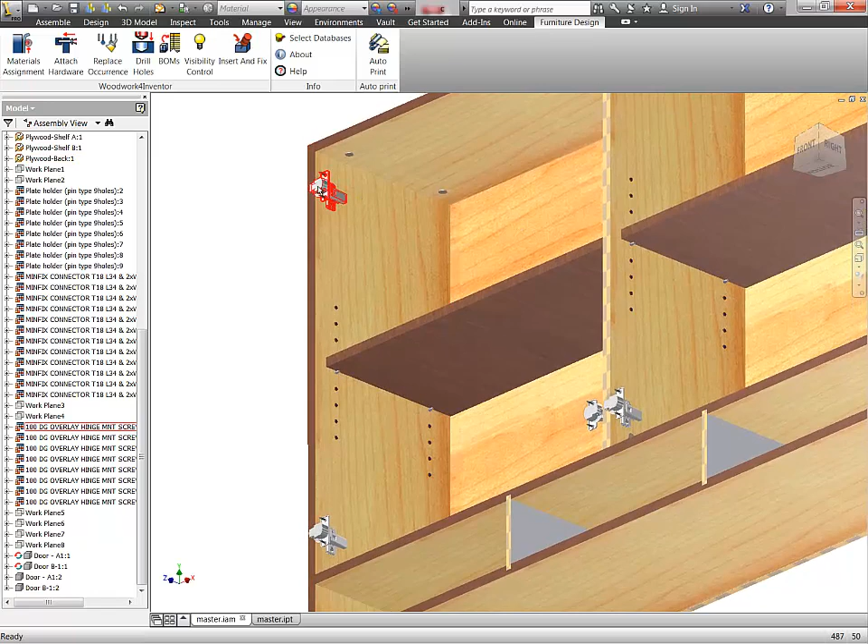So again, we can do this more in a manual mode in Inventor, but developing certain tools allows me to do what I call automatic drilling. I can just hit the yes button and it'll prompt me: do I want everything to be drilled at one time, or I can selectively drill what I want. And again, without going back and forth into parts, into assemblies, projecting all the things that we have to do today, this is taking care of it in one step.

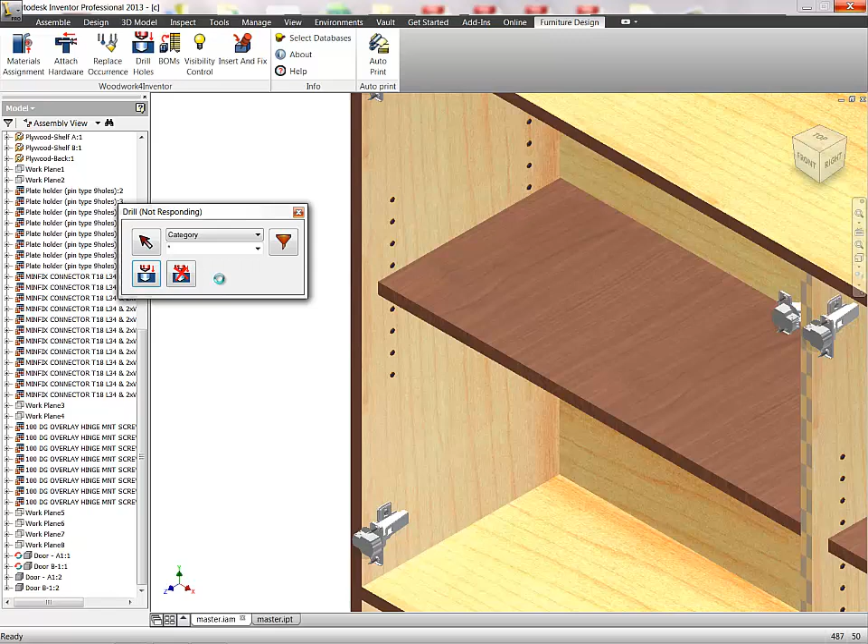That's why we can think of the joinery and the hardware after the fact rather than as we're building. Because as we're building, sometimes we're not sure where things should go. We're doing just conceptual modeling. We're trying different things, addressing different issues. Clients are asking us to change on the fly, and if we put lots and lots of time into the model, backing out of it sometimes does take a bit of energy.

So this is going to minimize as much of this, and we've seen people start using tools like this and save a day a week per designer. Also, it's going to give us accuracy, easy to attain accuracy.

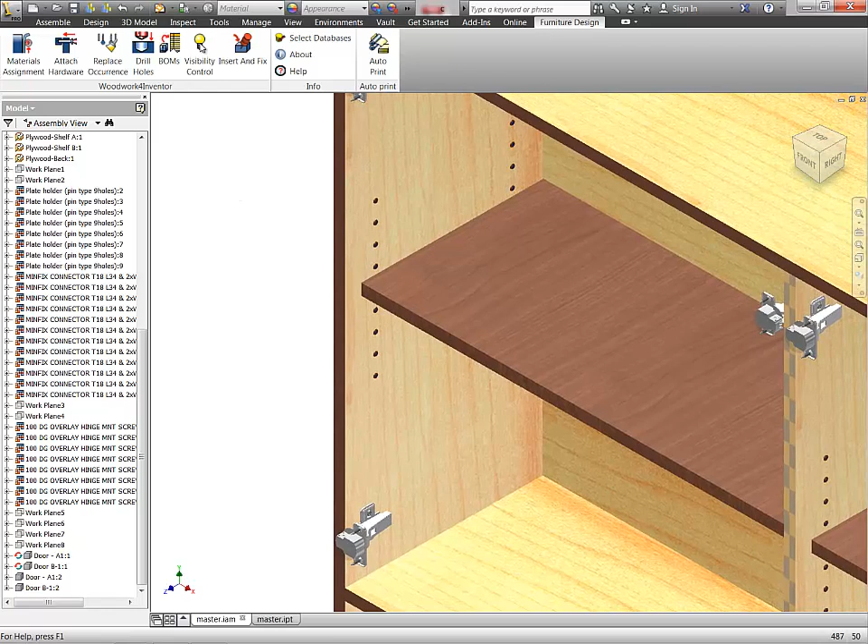I'll turn off the hardware so that you can see that all the holes, all the negative shapes were drilled. It's a one-time affair. We can do it up front, we can do it as we're putting the hardware in, or we can do this after the fact. So again, it's up to the individual user to determine when they would like to do it. But the workflow does change from what I'll call traditional Inventor workflow to a whole different mode and method.

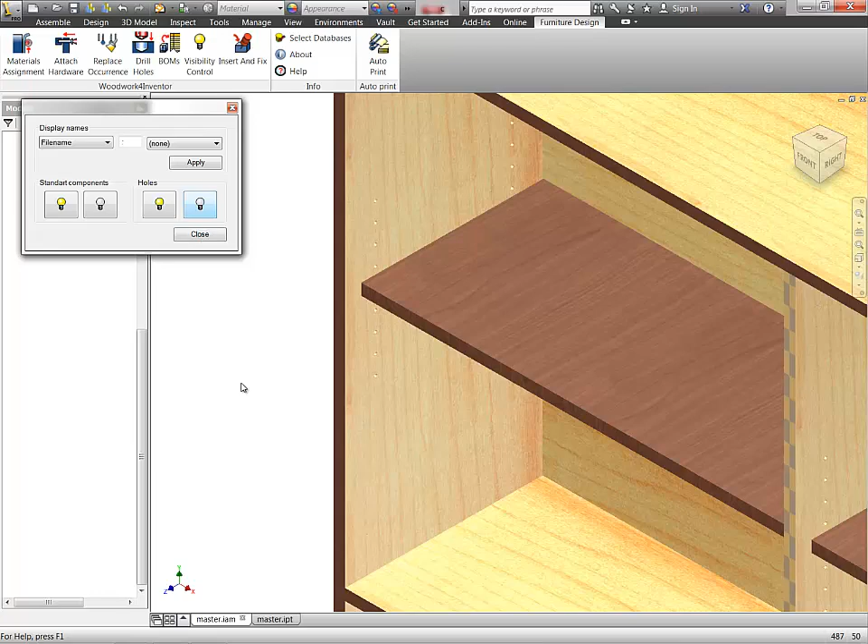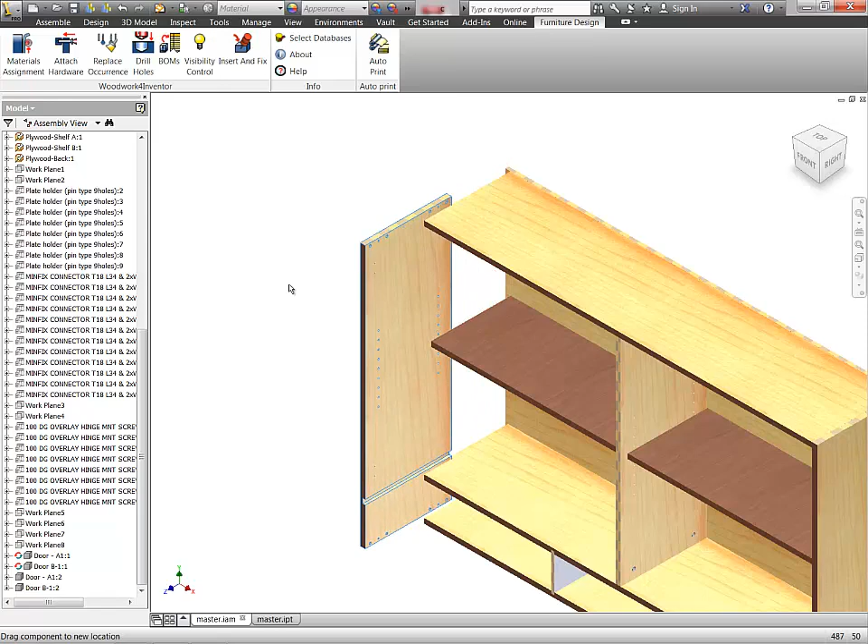I'm zooming in a little bit more so you can see that in fact it actually drilled the pilot holes for this. And if I go out to the fabrication drawing, of course all of this will show up. Now I'll unground the left hand side and I'll show you that it actually did drill all the holes, absolutely based on the cam connector configuration, including the clearances that were necessary at the time.

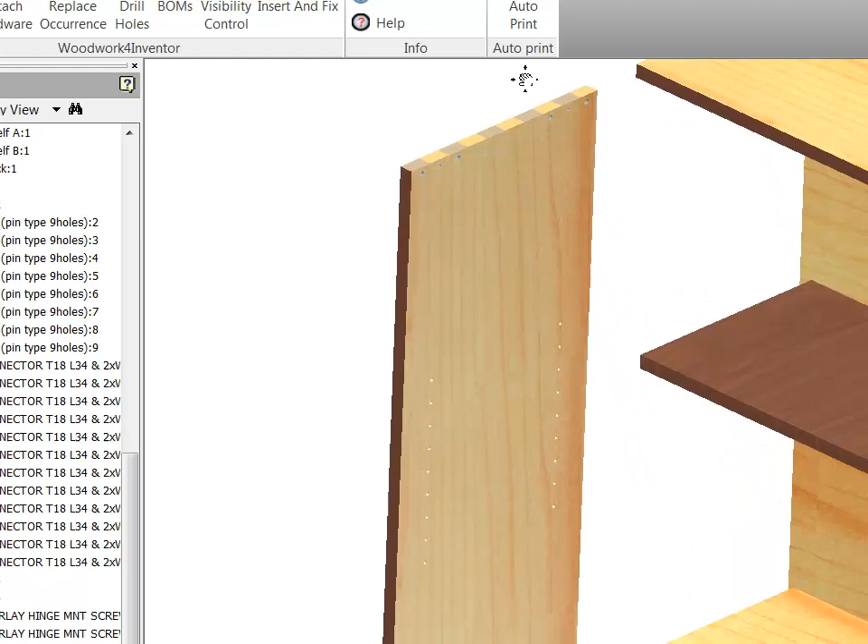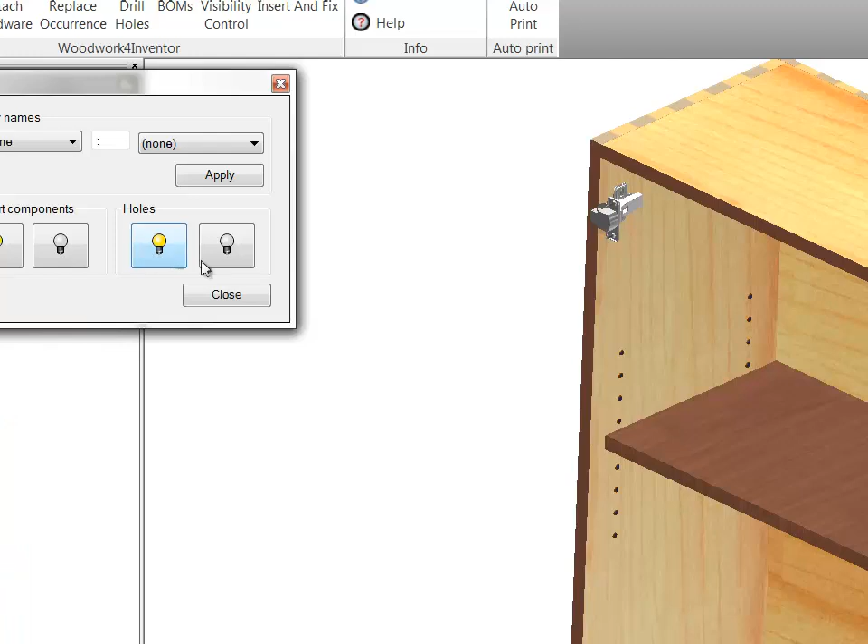Taking a look at the top horizontal piece, you'll see again the matching holes were drilled, and I didn't have to rely on adaptivity or projection, which could cause novice users to get into a little bit of trouble. Let's turn back the hardware and we'll recognize the fact that everything is definitely lining up the way that it should. So definitely a different workflow, hopefully an easier method to get up to speed. More considering design than anything else.

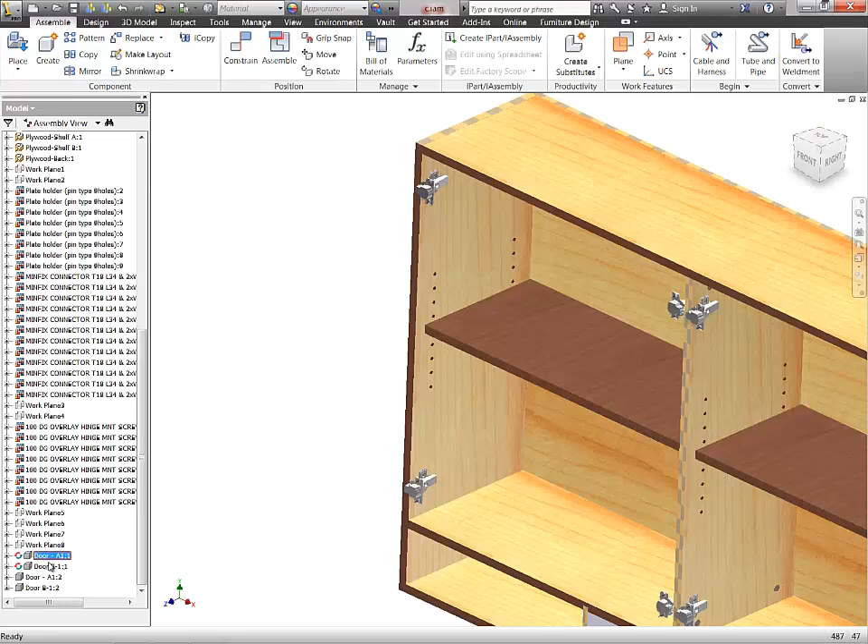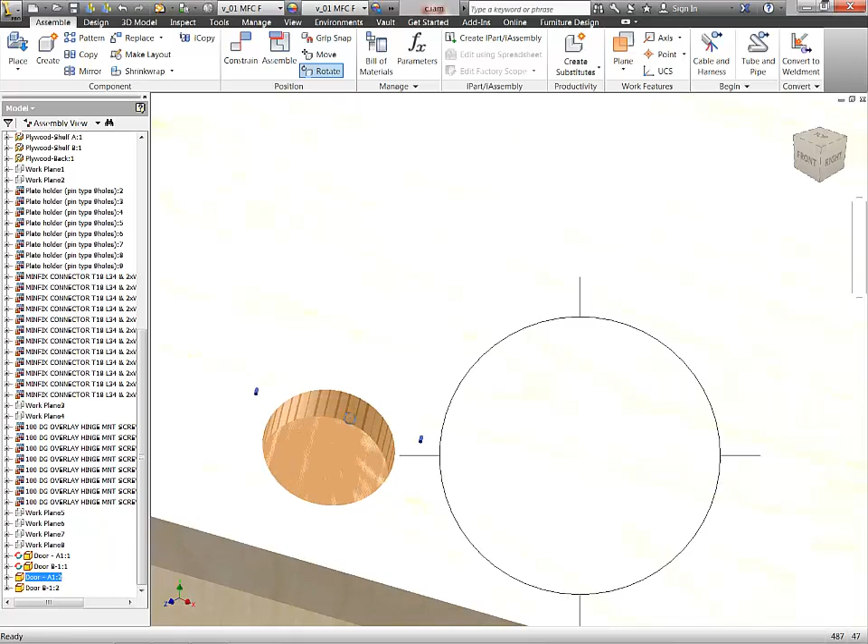So we save our drawings. Let's turn our doors back on. I had the doors off so we could see the hardware, but let's rotate a door. By rotating a door, you'll see that it also drilled the back of the door absolutely correctly, based on the hinging condition of the constraints that we put on to begin with. So it drilled the large pocket, and it did the pilot holes also on all four doors. So just rotating them so visually you can see that. And we'll do an update on that.

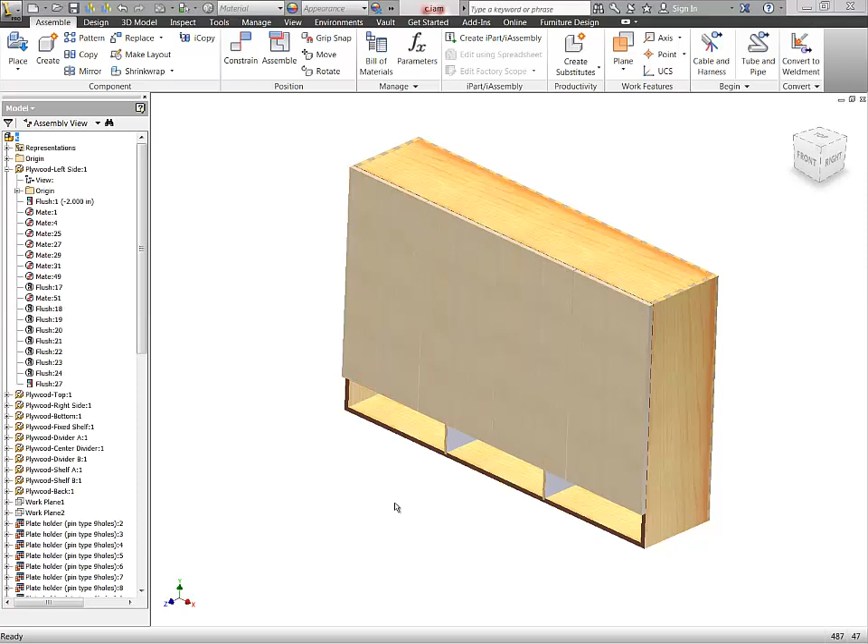So one more step. Let's go ahead and put some door locks onto at least two of these doors, a double door lock. So I'll turn off two of the doors so that we can see it a little bit better as we're attaching it. And as we did before, we're going to a library to place hardware that already exists. I can't stress enough to make sure that your libraries are up to date.

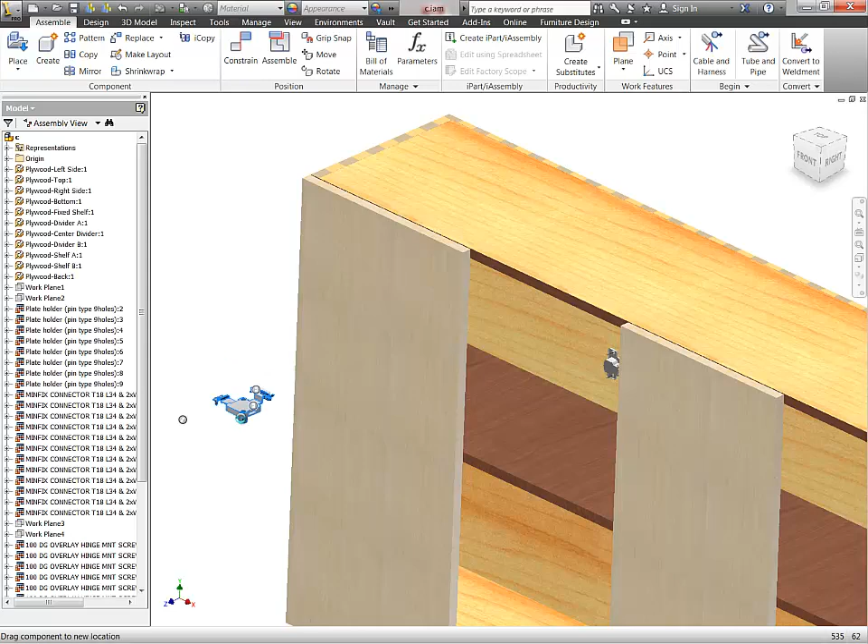That things are in place, because it's definitely going to save time. So bringing in a particular piece of hardware. This will be mortised into the top panel of the door. There's pilot holes, a whole host of things.

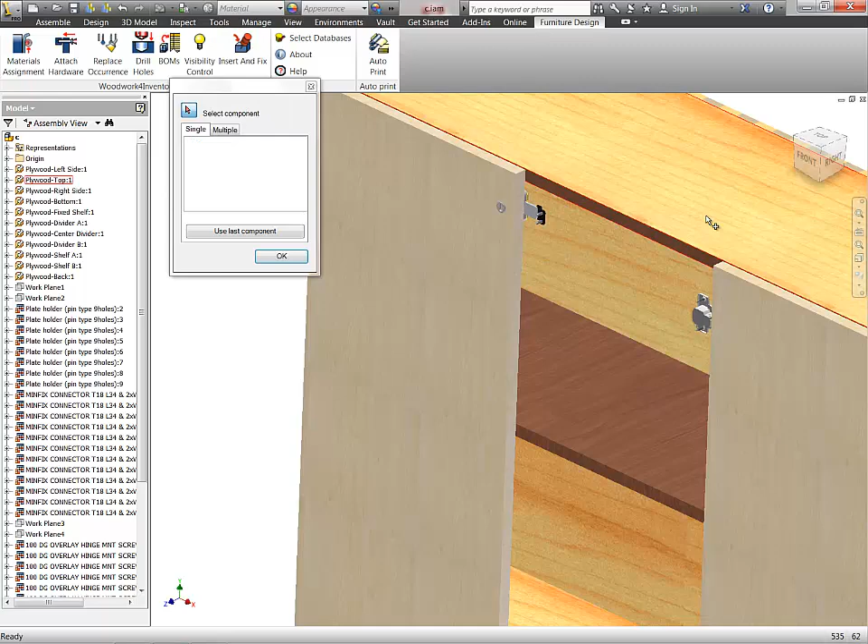And again, as before, we're going to attach hardware, and we can either attach it singly or we can attach it multiple locations. So it's going to ask me for the face of the door, it's going to ask me for the edge of the door, and then it's going to ask me for the top of the cabinet. It can't be simpler than that. And hit OK, and you can see that it places the hardware in automatically and accurately.

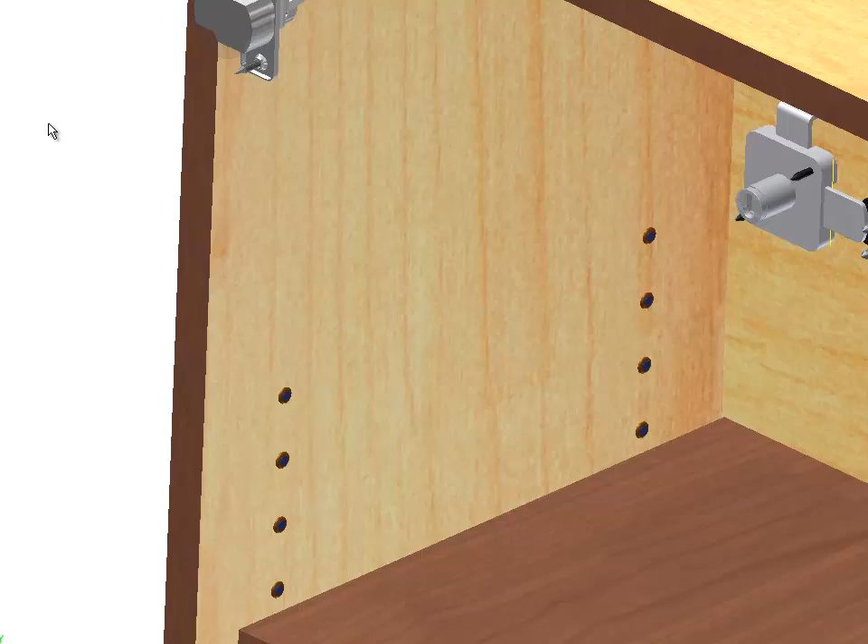So we'll turn off the visibility of the doors so you can see that there are multiple things that we're going to attach to or needs to be drilled. So as before, if we want to drill holes, all I have to do is touch what I want to drill and hit the OK button, and it'll drill those holes. So we don't have to drill the whole unit. All we have to do is drill a particular item if we so desire.

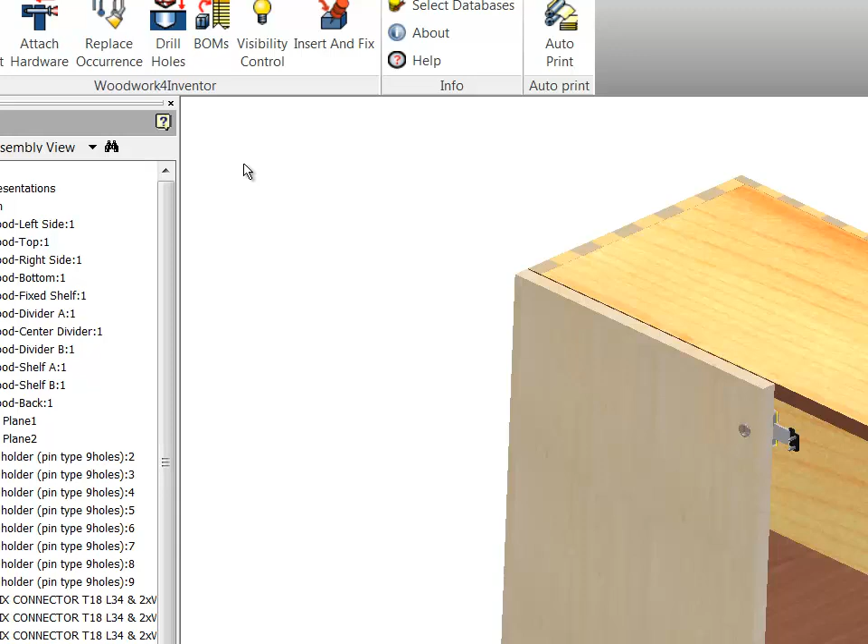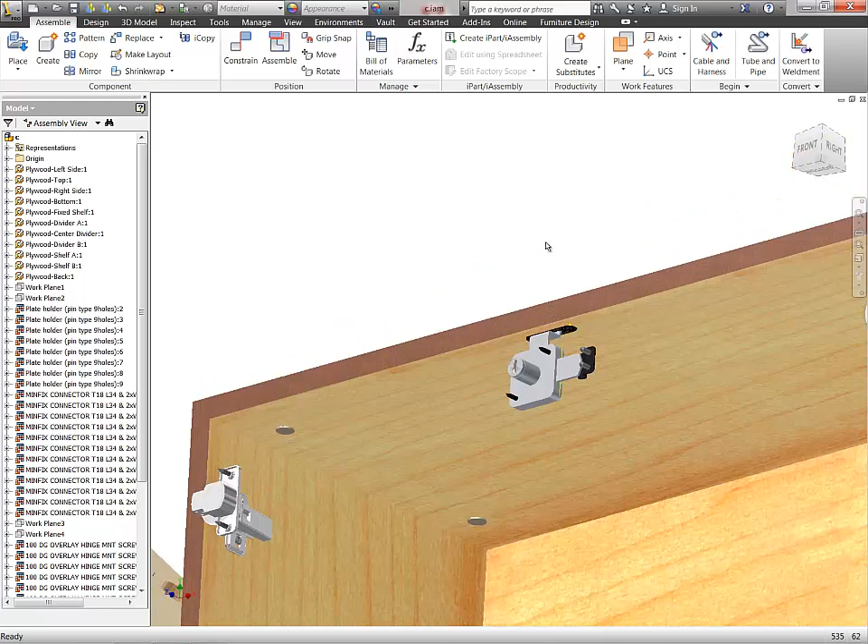Once you rotate the door, you'll also see that the pilot holes are drilled and the center pin for the actual key is drilled with it. As we get closer and we take a look at the top, you can see the top of the unit also is mortised. So you could have multiple things happening simultaneously and not at all be concerned about projection of at least 3 or 4 different planes all at the same time.

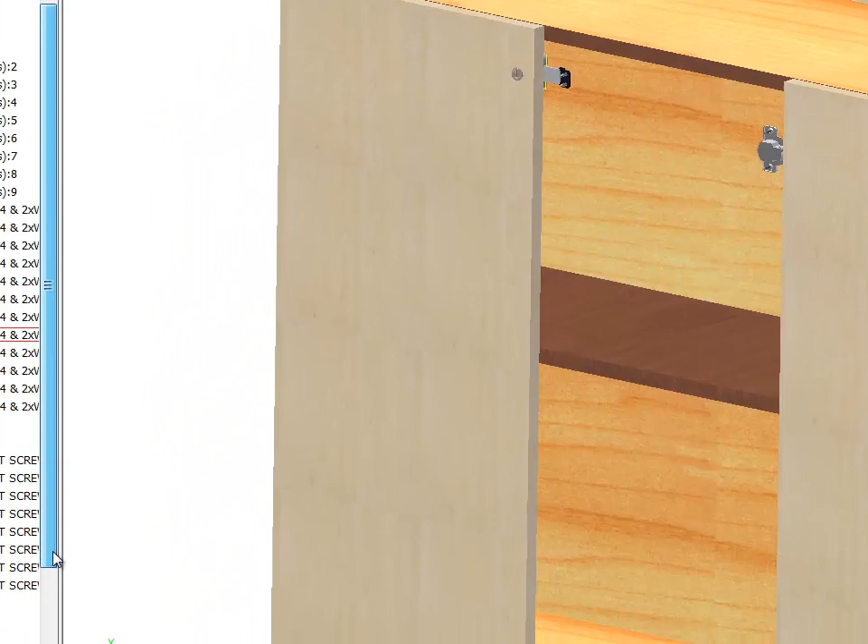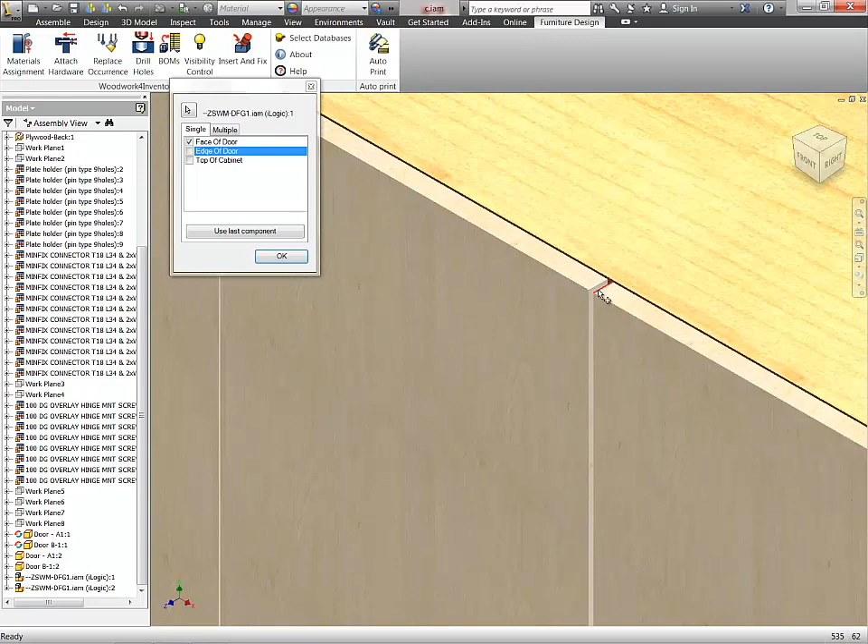We'll turn the visibility of all the doors back on, and I'm going to add another lock for the right side door, and the doors can be closed when I do this. So we'll attach the hardware, touch what we're attaching, pick the face of the door, which we just did, pick the edge of the door, and pick the top of the cabinet. And there we have it. Drill that, and we're done. Save our work.

Autodesk Inventor does quite a good job in terms of creating fabrication documentation from our 3D model, our assembly, and our parts. Creating front view, top view, side views, sections, details, creating parts lists, bills of materials, dimensioning, adding text and notes, basically creating a 2D document for printing or for presentation to clients for approvals. Many different aspects of the 3D model put into a 2D world.

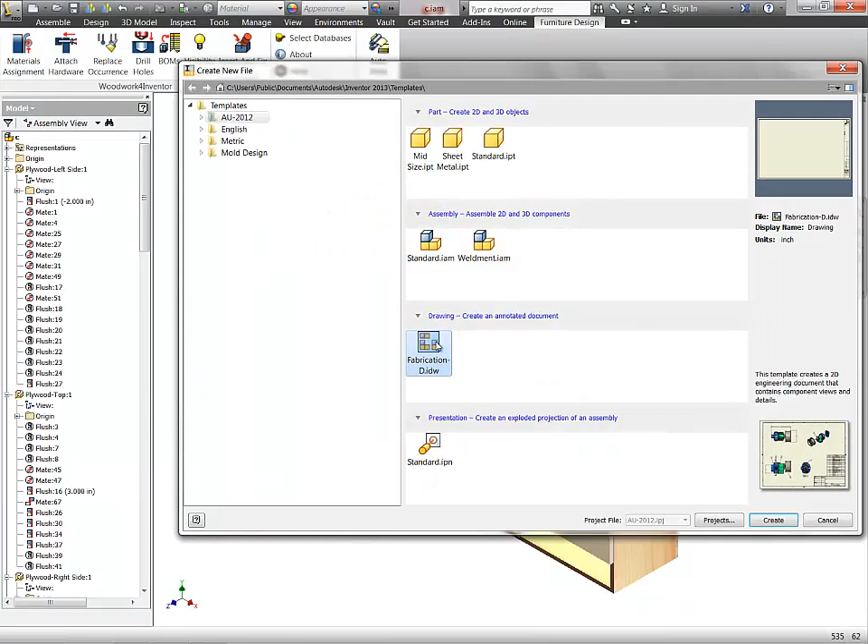What I'd like to do is show you, though, some of the automated tools that are available in many of the third-party tools that are available for you, and one of them is called AutoPrint. So first thing I'd like to do is to start a brand new drawing file, and this could be an IDW or DWG. It really doesn't make a difference, with attributes, without attributes, and we have a sheet of paper that we start.

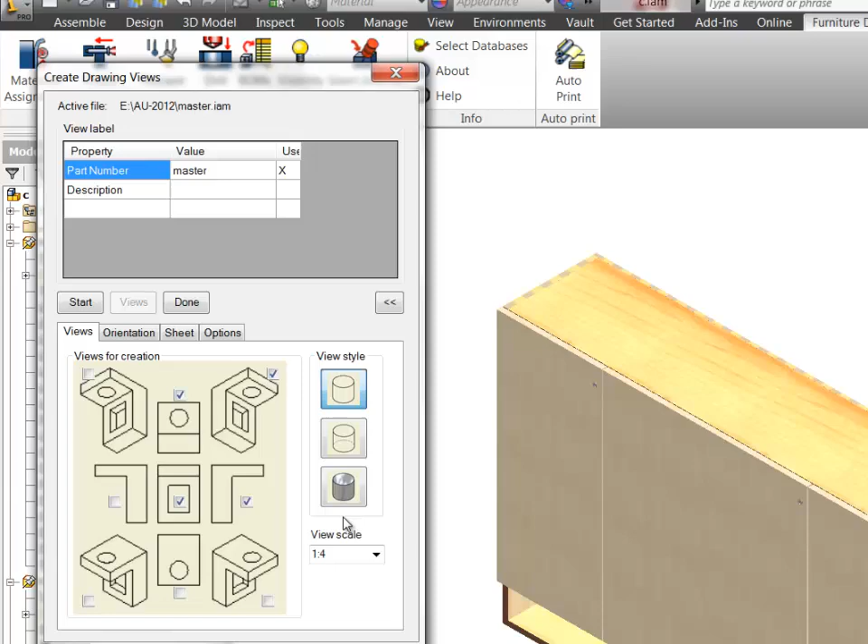Second step is to do AutoPrint, and in AutoPrint we have a dialog box that allows us to present shaded views, hidden line views, and so on, and which views we want and what scale we want. Once we've decided on how we want the presentation, then we can go to orientation and we can determine how things should be twisted or turned on the sheet of paper. And then, of course, what do we want to present? Maybe we don't want the hardware in the part views.

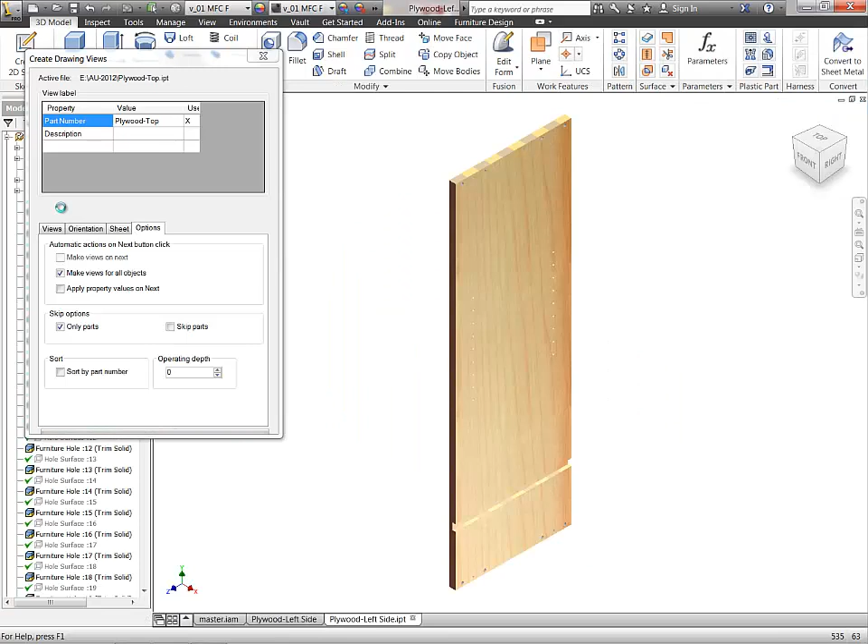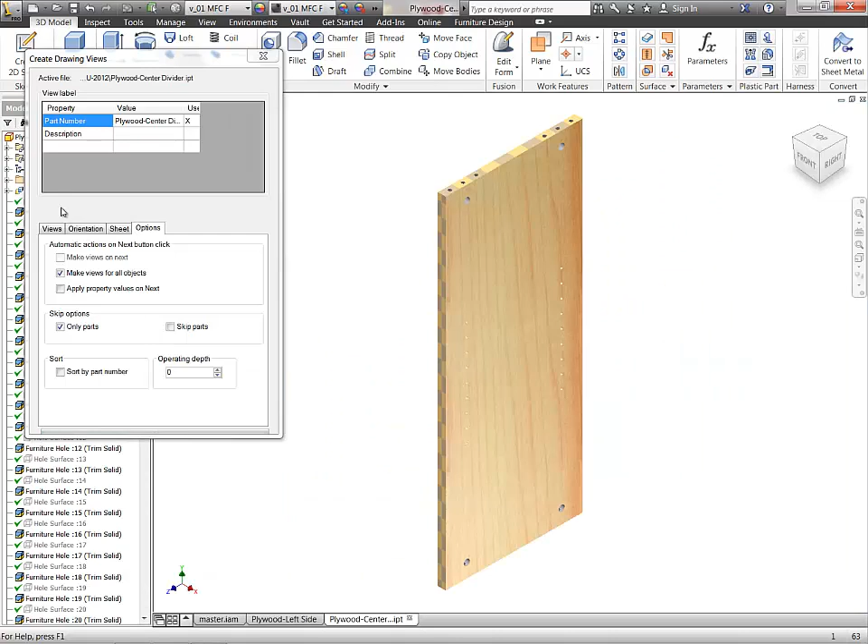So once that's done, all we do is hit the start button, and the tool will now interrogate the entire assembly and sub-assemblies and start creating separate drawing files of each of those particular items. If they have the drilled holes for the pilots, for the hardware, all of that's going to come across in the drawings themselves. And of course, they're going to be linked back to the actual assembly. So if the assembly adjusts, then of course these will adjust also. So everything we've done to this point, we're now creating drawings of.

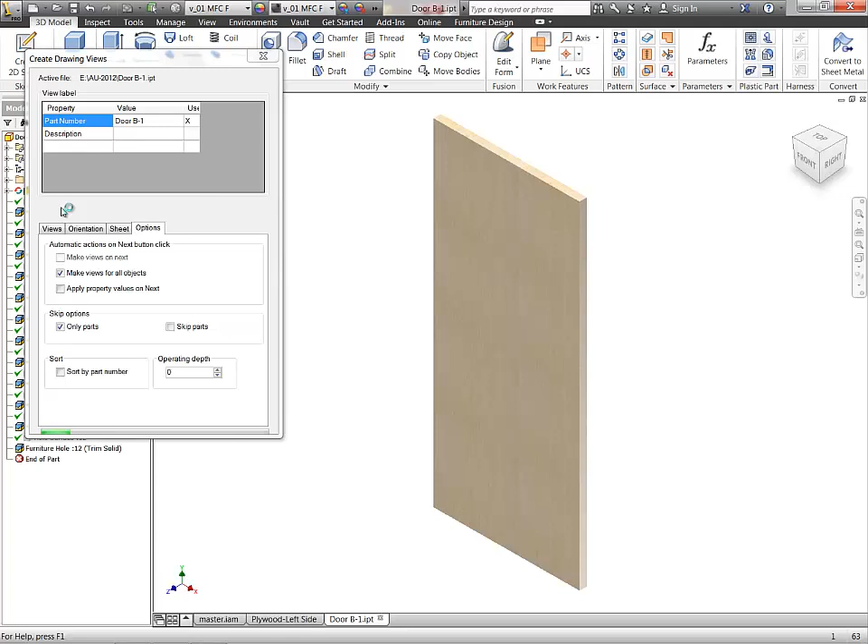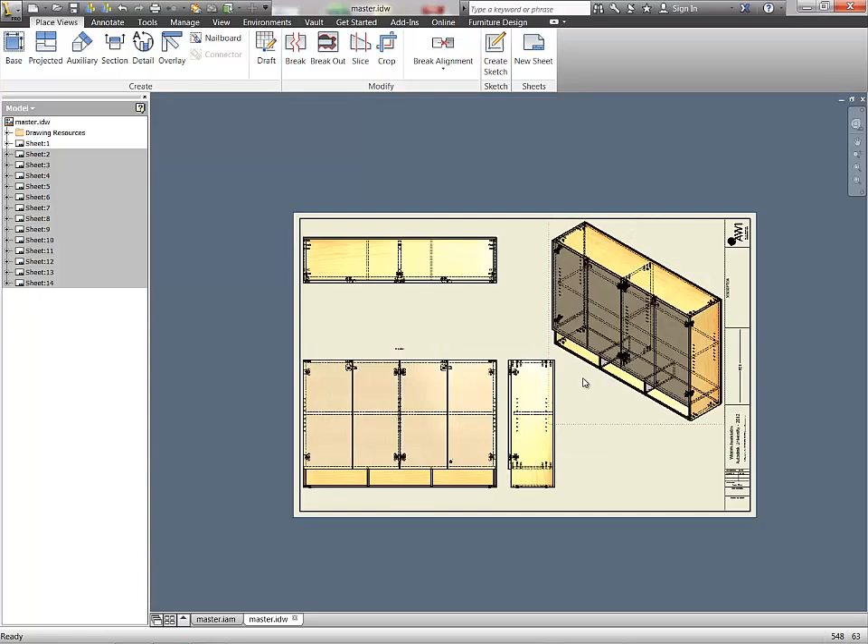Okay, so it's finished its process. Took under 40 seconds for about 15 parts. And then what I'm going to do is go into the drawing file and just take a look and see what we have. So in the drawing file itself, you'll see that we have in sheet 1, I'll call it the master assembly. That is the parts, the full assembly showing all the parts, all the hardware, everything else.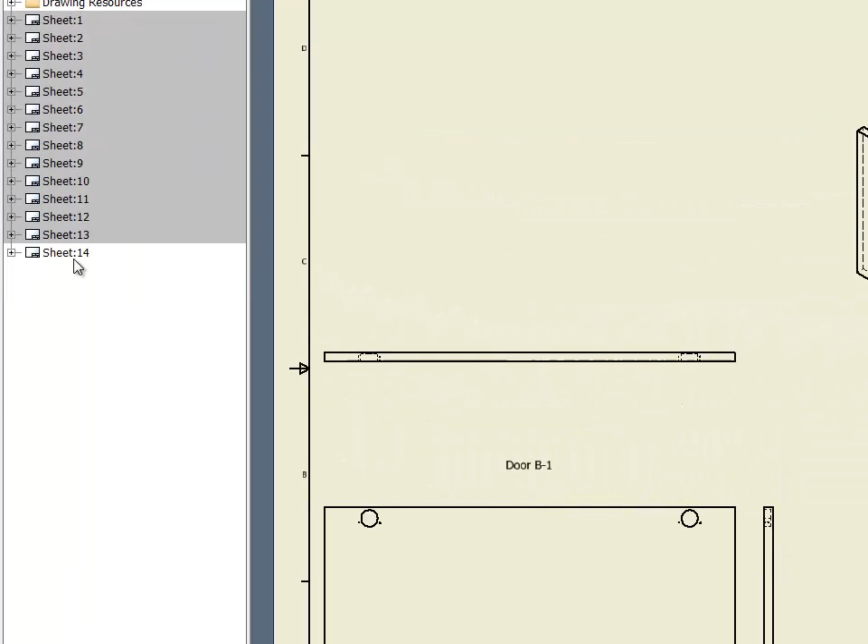If I go to sheet 1, you can see it's the left side, sheet 2, the top, and so on and so forth. And what's going on here is on each separate sheet in this drawing file will be a separate part. The parts will be numbered or lettered based on the name. This is called door B-1, and that's a plywood top. So again, very simple, easy to do.

Now let's take a look at the assembly again. And I'm going to turn off the visibility of the door and take a look at the fact that we did do some edge banding there on the top and the right hand side. So here's plywood top drawing. And I have a tool called Mark Edges.

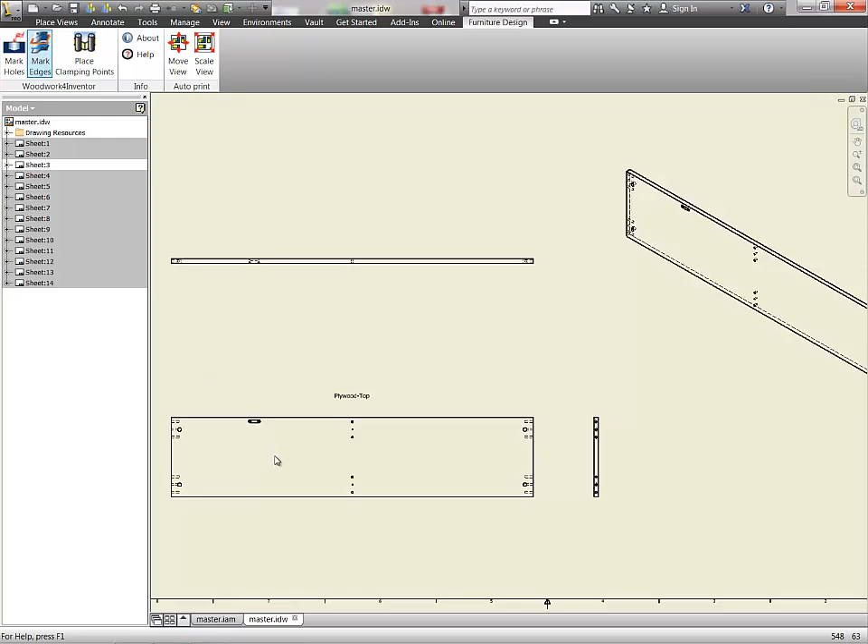And when I pick Mark Edges and touch that top, several things are going to start to happen. It's going to interrogate the drawing and it's going to mark it in two ways. One, to show the edge banding, and two, to show the grain direction. So I can do this on individual drawing sheets, or I can do it on all drawing sheets.

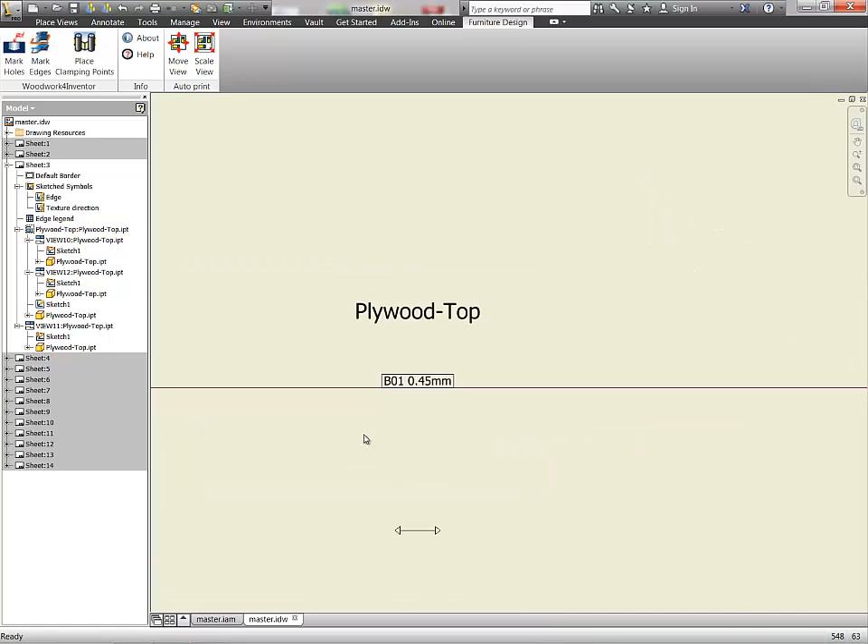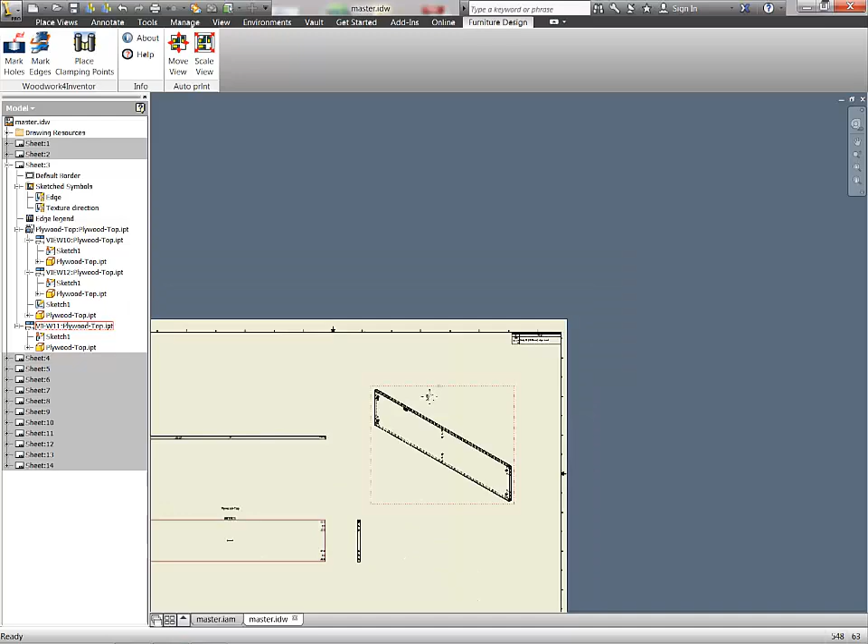So if we take a look now and I zoom in, you could see that that is the code name for that piece of edge banding, and you can see there's a thickness there. And that thickness is showing you the edge banding that of course can be dimensioned. If we go up to the top right hand corner, it also creates a legend of what edge banding was used. So if edge banding is part of your day-to-day operation, then this might fit. It's also showing you grain direction all at the same time.

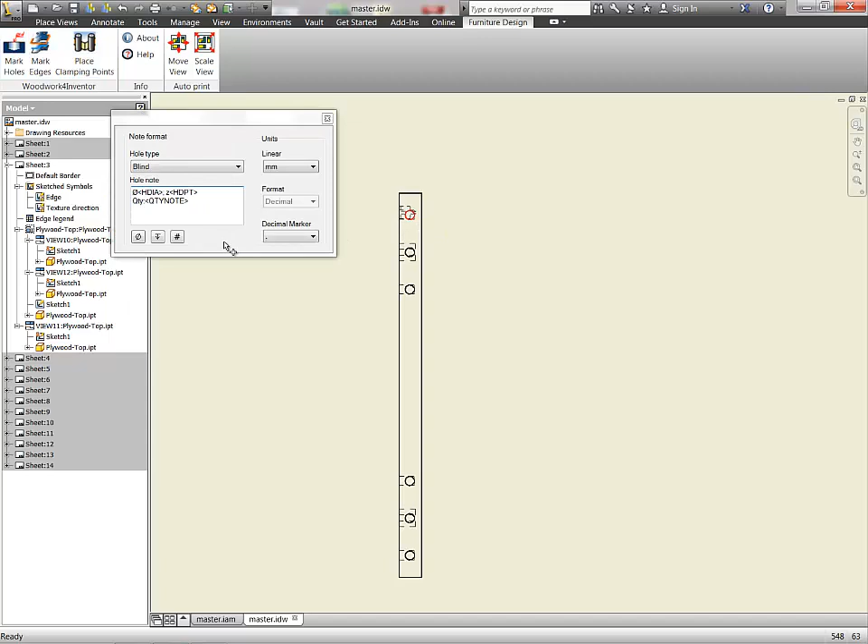And then of course if I want to shade it, I can shade it because it's going to utilize all the same tools that are in any drawing file in Inventor. Hidden lines, not showing hidden lines, all those things are absolutely doable. We can also do something called mark holes. Okay, it's very much like the hole command, but it is going to be slightly different in our world because it will create a whole environment on a leader that's unique to woodworking.

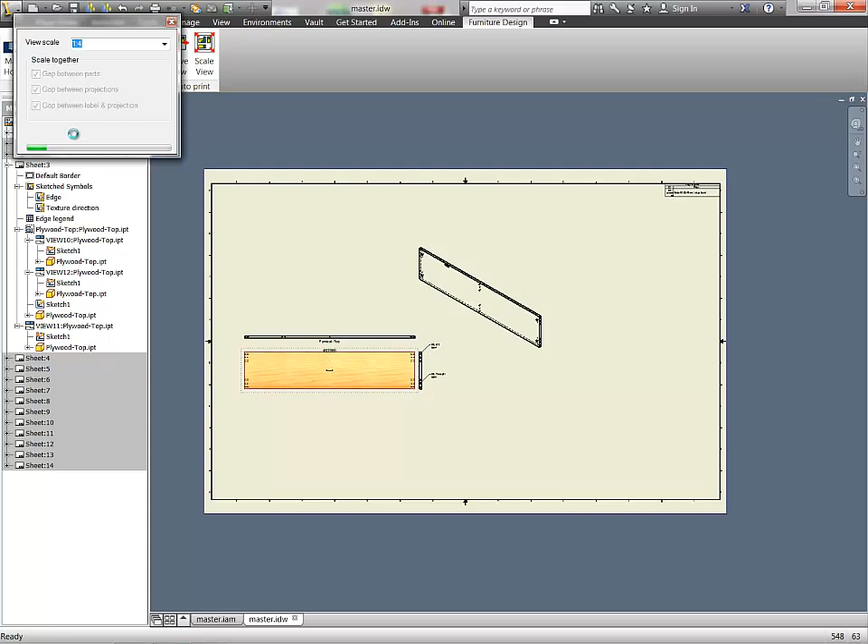So we have a couple other tools that are part of it. We also can scale views. Now this is a little different than scaling in normal drawing files because when you pick scale, it scales all the views at one time. Now you can only do that with projected views, but what about isometrics? This is doing all of them at once. So again, some enhancements that might be beneficial for you.

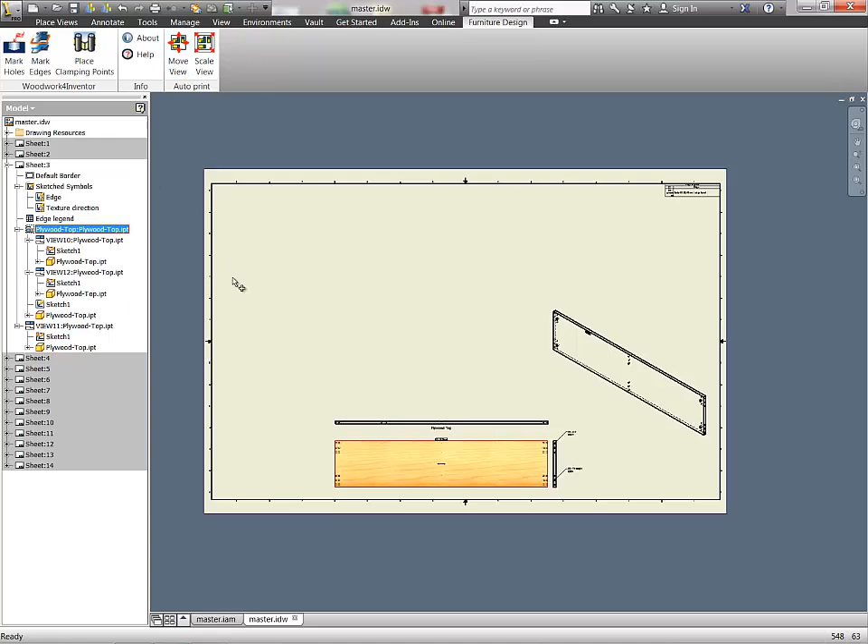You can also move all the views at one time and keep them oriented to themselves. Normally that's something you can't do with the normal tools in Inventor. You can move one view at a time or the projected views. So edge banding can be utilized here.

iLogic has been available inside of Autodesk Inventor for the last several versions and is probably one of the most effective tools in the creation of library items that can be reused over and over again. Very effective, and it acts as a configurator. So when we're building doors, drawers, carcasses, we have the ability to apply a menu system that allows for change. Again, very good for standardizing anything within the design environment.

So let's get to the model and take a look at how we can apply iLogic to it. The first thing we're going to do is go into parameters when we're in the assembly and assign 3 or 4 parameters to the assembly. Length, which again will control the model. We'll say 60 inches. We'll now apply thickness, which of course was 3/4 of an inch, because I want the ability to change it at any time.

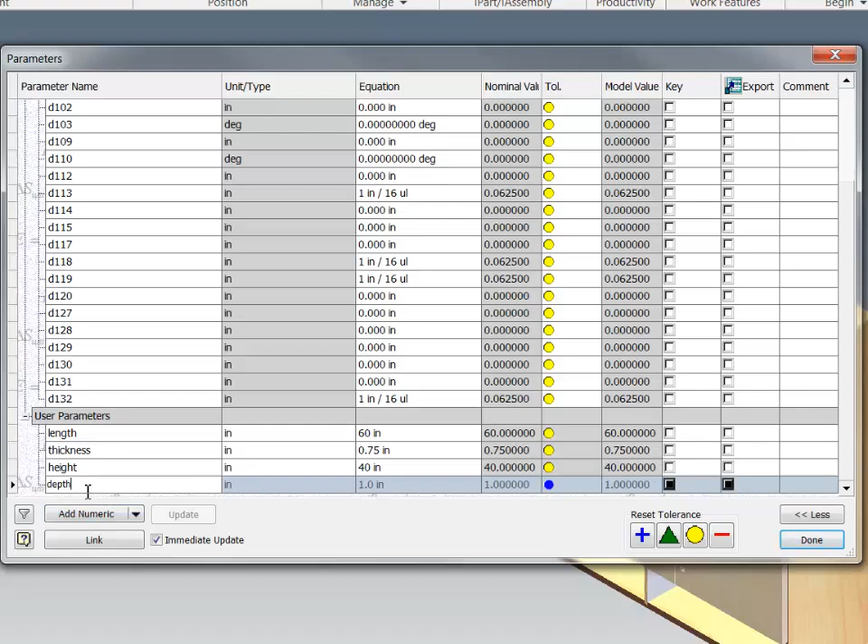Other parameters, for example, the height of the cabinet, which I believe is 40 inches. And then finally the depth, the front to back dimension of the cabinet, which is 13 inches at this moment. So what we've done, we basically have added variables to the assembly, but we've not hooked it to anything.

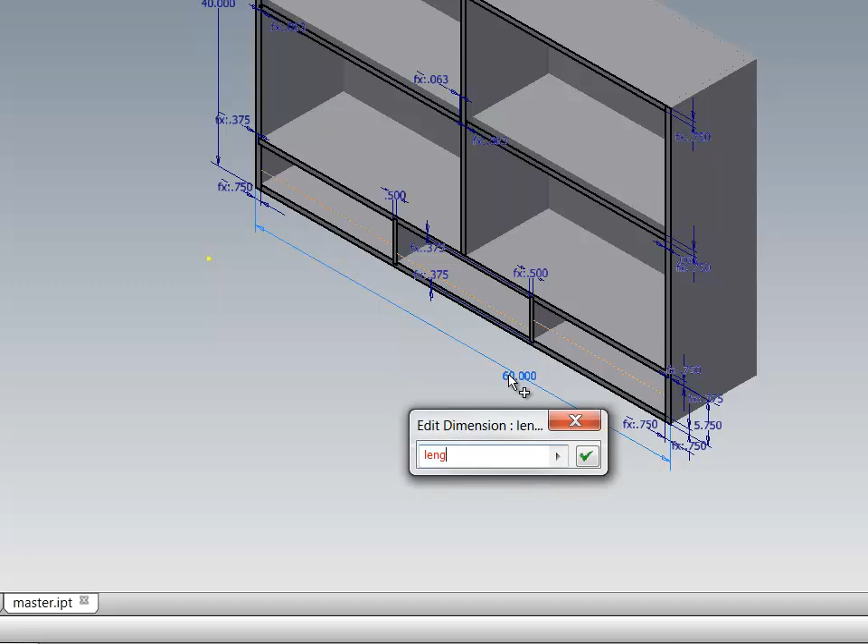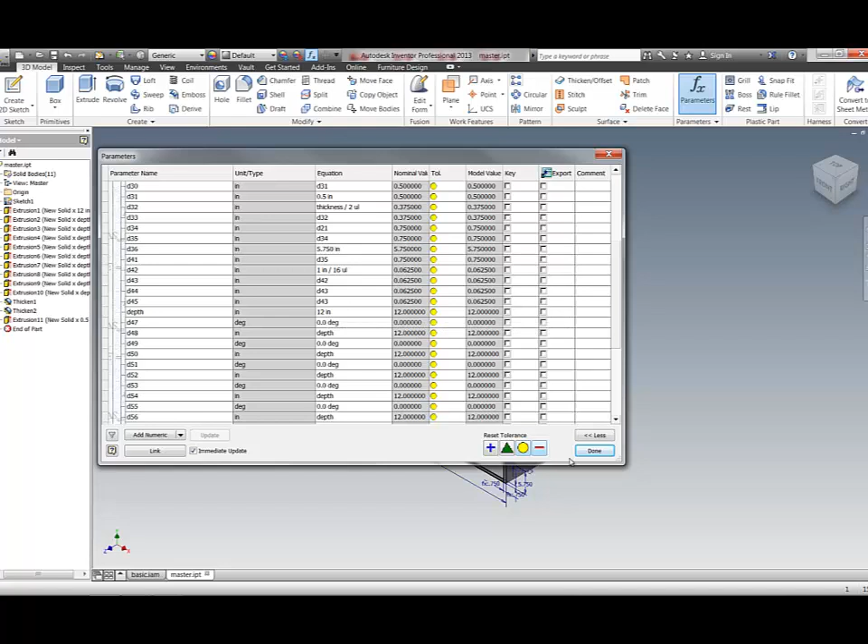So the next step is, let's open up the master part. We'll double click on the actual dimension that was length and type in length equals 60. So we added a variable. The next thing we'll do, height equals 40. Again, this will change the parameter table. And then if we go into parameters, you'll see we have length and height. We already have thickness because we've assigned it, and we already have depth because we've assigned it. So we've done everything that we need to do.

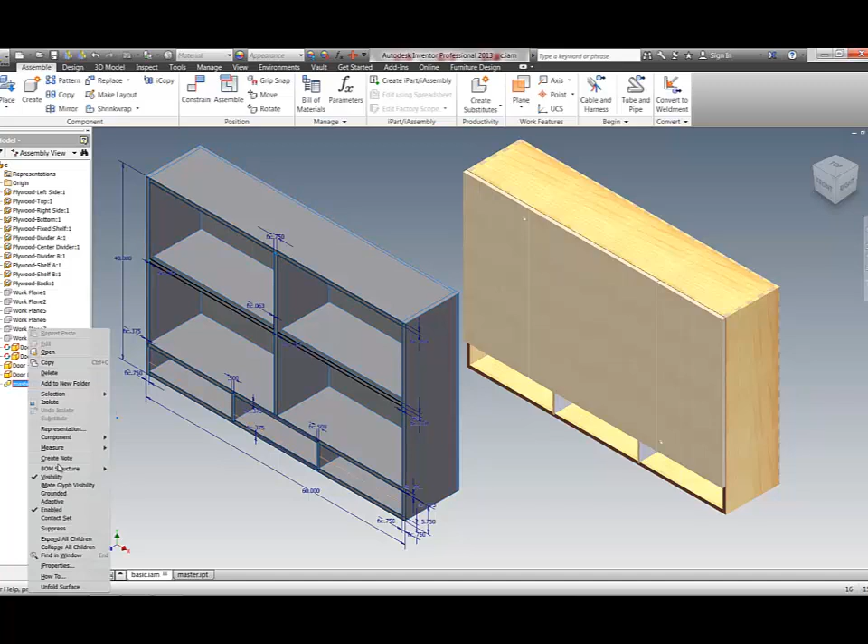So we save the part file, the master part file, and then we do a copy and paste, and then we bring the master part file into the assembly itself. So we're pasting it in, and once it's pasted in, we'll just turn the visibility off of that part. So we have that within this environment, and we hit save. So those are a couple of quick steps.

At this point, we go to Manage, we go to iLogic Browser. We see we have what are called rules and forms, and the first rule we're going to set up is a rule that allows us to pass the assembly information to the parts themselves, thusly controlling the part. And this is a very, very simple, straightforward process. So we hit OK, and it opens up a dialog box that allows us to do some minimal editing.

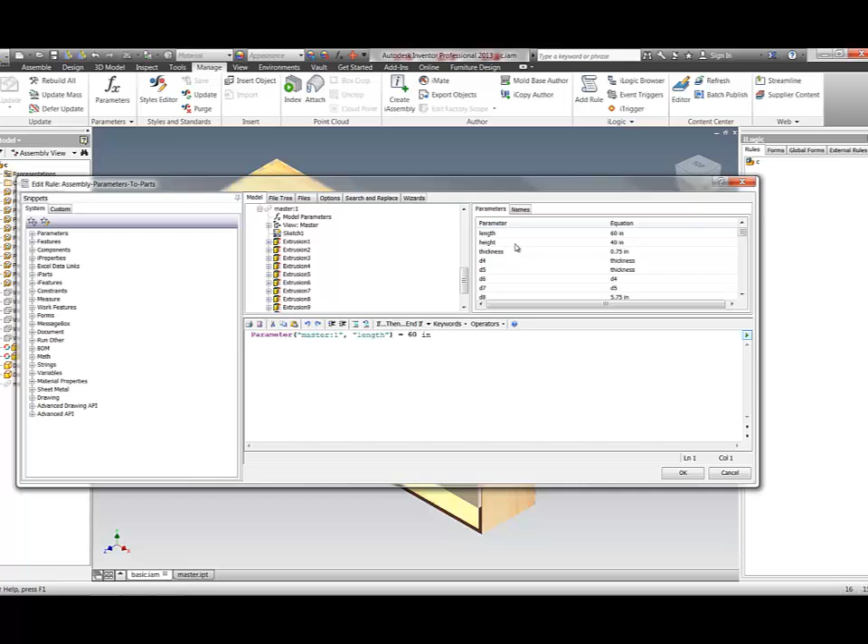So we'll go down to the actual part file. You'll see there's a directory structure here, and we'll grab the length, right click on it, and right click on height, right click on thickness, and right click on depth, and this will capture the current state, and you can see that it's filling in the information in the lower box. So it says the parameter in the assembly equals whatever the value is at the moment.

Then what we'll do is go over to the assembly parameters and say let the length value in the part file equal the length value in the assembly file. The same thing with height, the same thing with thickness, and the same thing with depth. Again, this will be in the handout, and it'll also be in the demo set for the class.

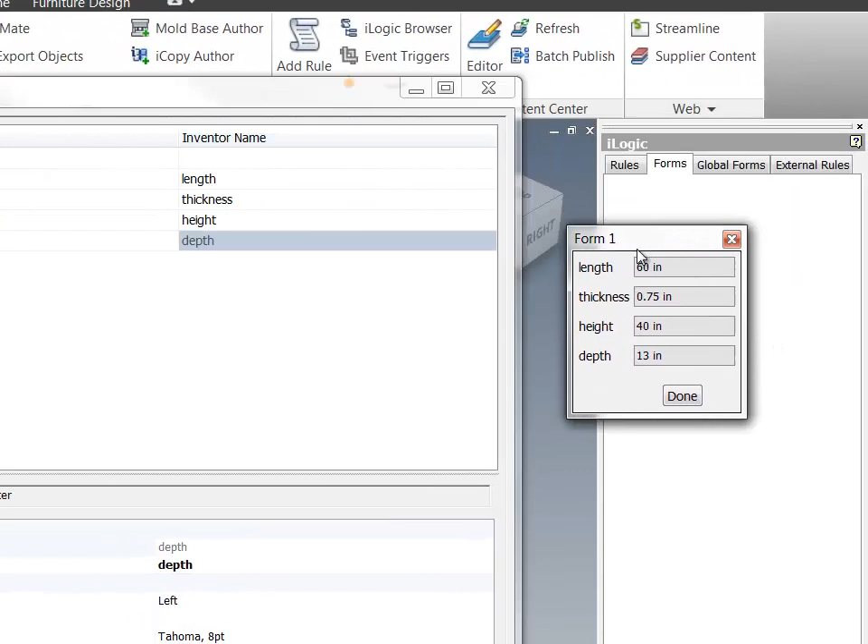The next thing is go to the forms, and you'll add a form now. These are what are in the assembly at the moment: length, thickness, height, and depth. So you capture all of them, you drag them over to the right hand side, and it automatically creates a dialog box for you. It's that simple. Just right click, move them over, it brings in a dialog box.

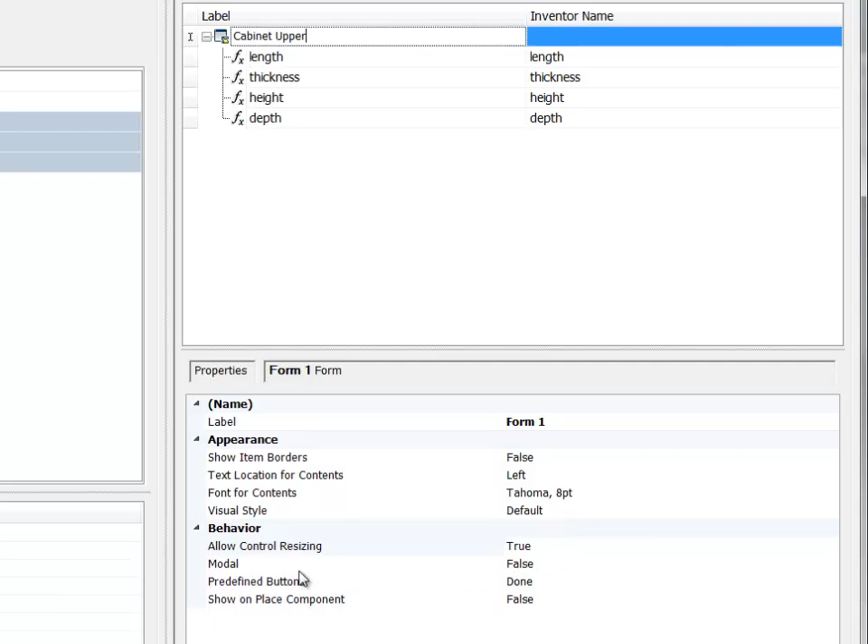At the bottom of the dialog box, you can actually change the way that the form will look. You can type in the name of the form, what you want to call it, and everything is done through a menu-based system. Predefined buttons, I will say I like using OK, cancel, and apply. And the visual style of the dialog box might be 3D. Okay, once this is done, I hit OK,

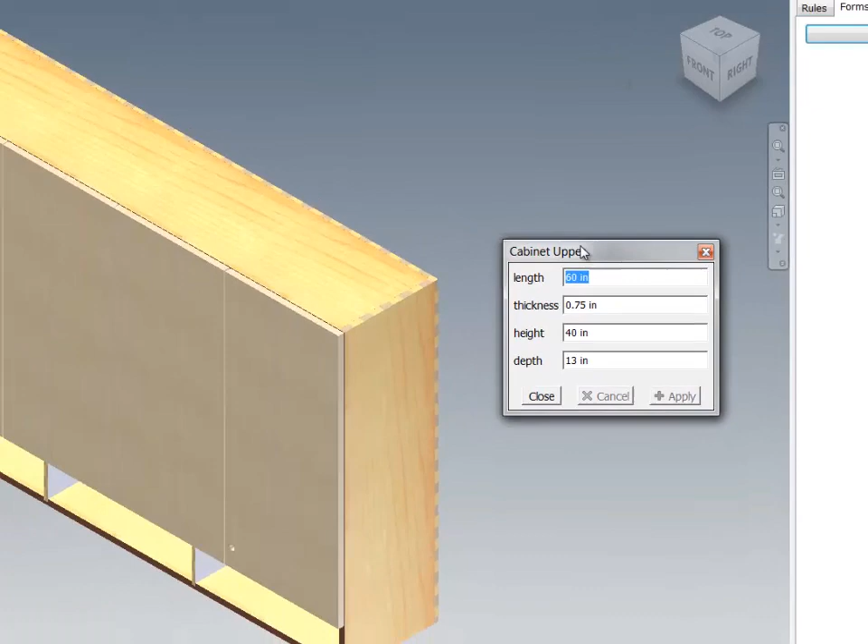and I have the ability now to just hit show me the dialog box, and you'll see that the cabinet upper now has 4 variables associated with it, which basically means when I bring up this dialog box, when I place it into a new assembly, when I do anything with it whatsoever, I can change those 4 parameters or more if I so desire. So again, very simple tool that allows me to totally configure the system.